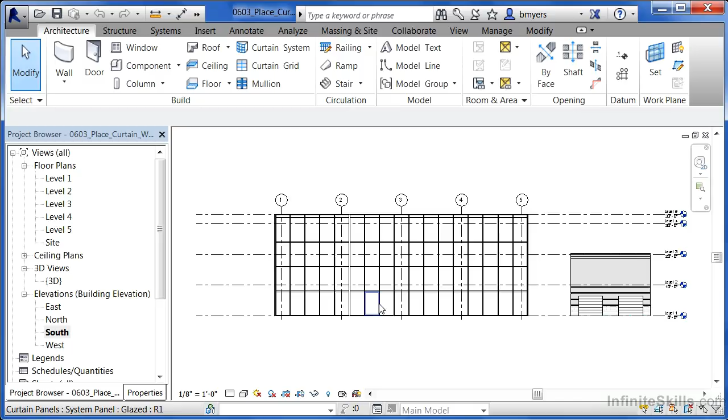And then if you click the Tab key on the keyboard, continue to do that until eventually one panel is highlighted blue all the way around that panel. Then just click in order to highlight it. When it's highlighted, you'll see a pin. Click on the little pin head to unlock this particular panel so that it can be modified.

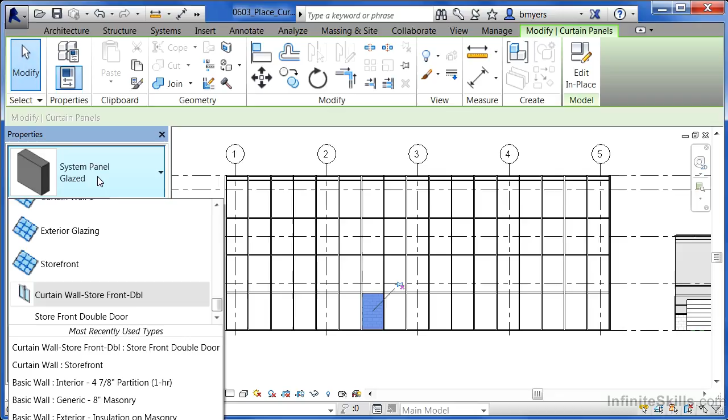At this point, go to your Properties tab, and you'll see that this is a System Panel Glazed. Click on System Panel Glazed, and at the bottom of this list, click on the words Store Front Double. And it will replace that particular panel with this style of door, which is a particular door panel. One problem we have here, though, is it's currently sitting on top of a mullion.

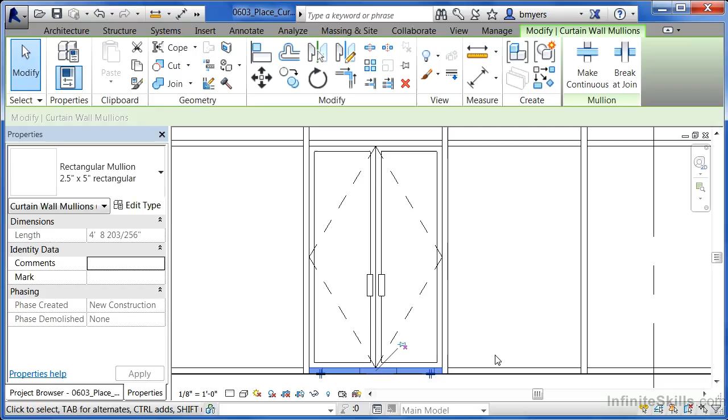To get rid of this extra little mullion, simply highlight where that mullion is, unpin it by clicking on the little pin head, and then either right-click and delete, or just hit the Delete key on your keyboard, and you'll see that the door will automatically adjust to fit inside of that particular panel.

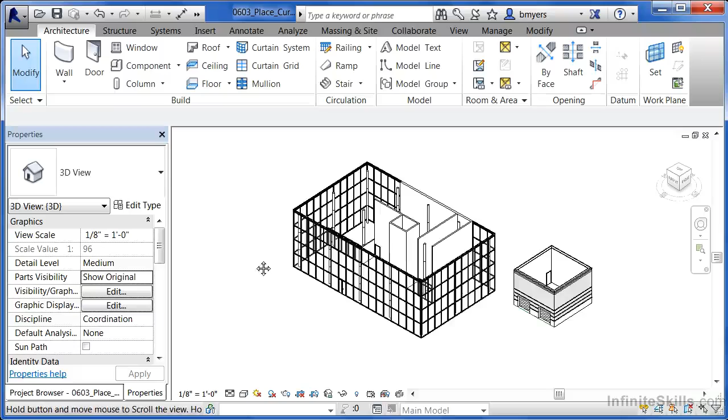We can do the same sort of thing with our interior curtain walls. Let's close this view down by clicking on the X up here in the corner. Select your 3D view, and let's take a look at our interior curtain walls. I want to point out that you can spin this building around by holding down the Shift key and the wheel on your mouse at the same time, and now move your mouse from side to side while holding the Shift key and the wheel down.

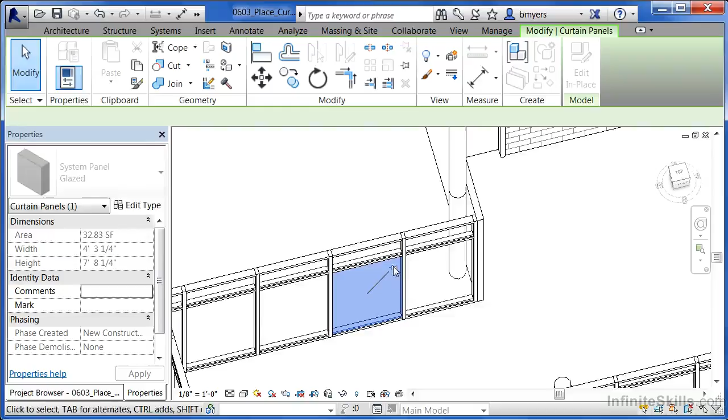In this case, once you're in a position to see your two interior curtain walls, zoom in, move your mouse over where one of these panels is located, hit the Tab key, and then highlight that particular panel. You'll notice that this panel is currently grayed out under Properties. Click the pin head, and it's no longer grayed out. You can once again replace this with the Storefront Double.

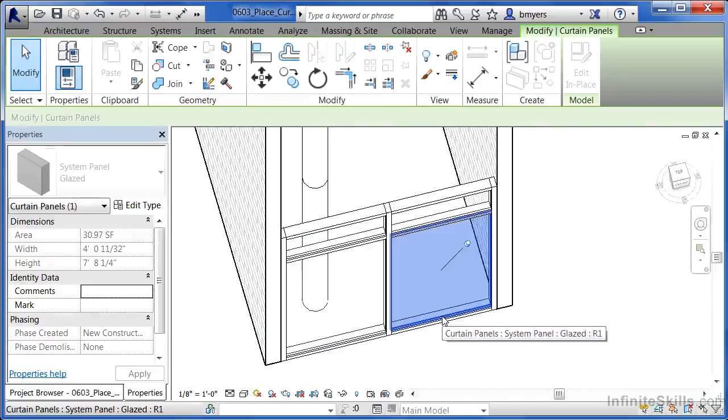If you zoom in, move your mouse until that mullion at the bottom highlights, unpin it, and then click the Delete key on your keyboard. Do the same thing over here on the side. When you're at the edge, hit the Tab key until the panel highlights. Once it highlights, click on it, unpin it, change this to be the Storefront Double, click on the mullion, unpin it, hit Delete, and now we have doors on the inside of our building.

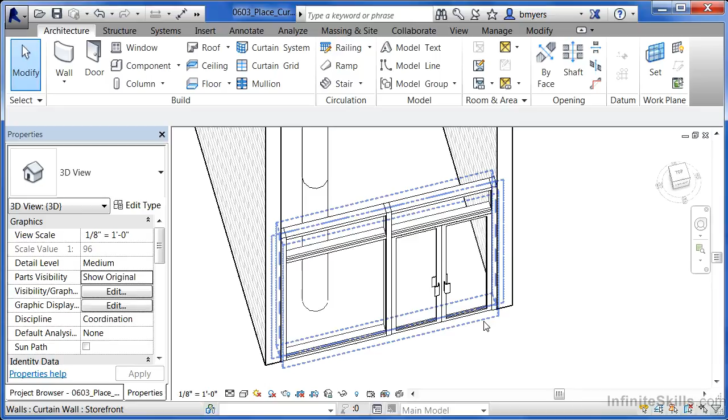So to place doors into curtain walls, it's important to remember that you can't place a regular door into a curtain wall. It has to be a door panel. And to do that, you need to hit Tab to highlight the panel. Once that panel is highlighted, and sometimes you might need to move your mouse around to get it, you click on it, unpin it if required, and then choose the appropriate door off of the panel list.